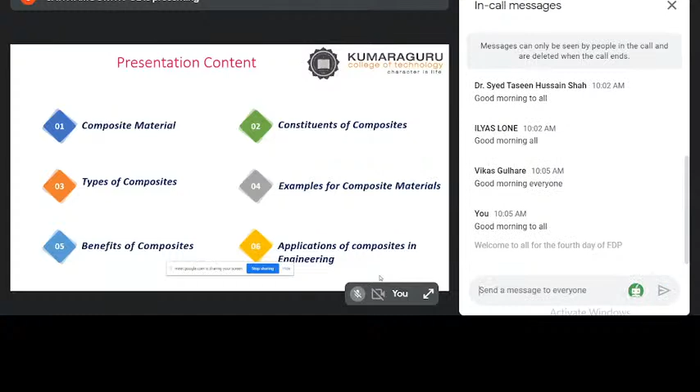Then why people want to do more research on composites and what makes them go for composites. What are the benefits they want to highlight about composite materials by introducing them to the world, that I wanted to share with all of you. Then I wanted to touch upon some important applications we currently make use of and how it supports achieving sustainability and sustainable goals that are spoken about today widely by many institutions.

That is very important because any material we develop should not spoil the specifics which generations need. That is what, in the present, we want to go for in development. Keeping this in mind, how far these composites are widely used for supporting sustainability, that I wanted to discuss. I want to leave the session for at least 10 to 15 minutes for any queries to be answered.

Hope I am audible, madam. Am I audible? Yes, sir, audible. Thank you, sir. Don't mistake me, just wanted to check it because I am talking to the group. Sometimes because of internet problems we may miss the audience, that is why kindly excuse me, sir, madam.

Coming on to the introduction to composite material, it is nothing but a combination of two or more different materials that results in a superior, often stronger product. This is very important because whenever we aim for any material, it should give superior quality by removing the shortcomings of the individual materials. We combine them together to make a superior material. That is the idea behind research in composite materials.

Simply, composites are the combination of components. An ideal composite is made up of materials that complement each other's shortcomings. This is very important because, when we say concrete, we know pretty well it is good in compression but weak in tension. Similarly, as a civil engineer, we know that RCC will act as a monolithic, single material, but by doing RCC it is called one of the finest innovations in civil engineering. Like that, when shortcomings are there, they have to be removed by combining two materials. That is what the composite material definition says.

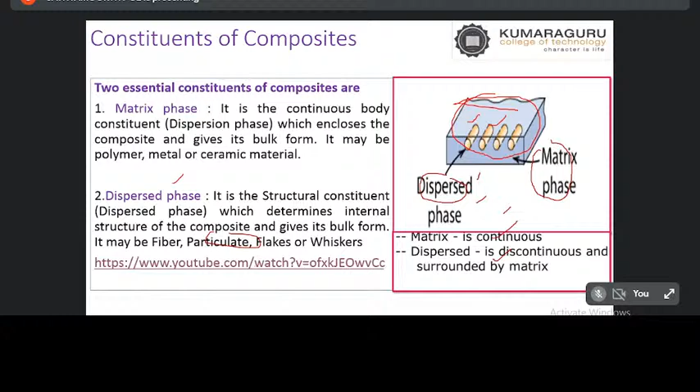Anyhow, that is what we are seeing. A glue-like disperse phase, and obviously a matrix phase will be there in order to form the composite material. Whereas in the form of the particulate, the fiber, all those things, we can make use of it. Thank you, sir. We can go for the creation of the composite material.

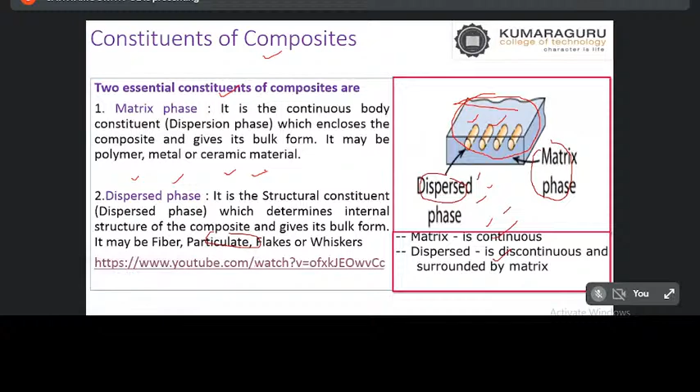That is what is very important, because without having dispersed phase as well as matrix phase, it is very difficult to form the composite. But it could be of any form, maybe a glue form or maybe tying form, whatever the form. In simple terms, the polymeric matrix and the reinforcement fibers will come up as a composite.

The reinforcement material could be glass fiber, natural fiber, carbon fiber. That is what the research nowadays is going on. We call it green composite. Of course, bamboo is almost being implemented in the place of reinforcement. Like that, many research is going on.

My idea behind sharing this to all of you, our young student friends, as well as the professors who are about to start their research work, is that this can throw some light on the natural fibers and how they can be used for the benefit of engineering. So that would be highly helpful.

Again, when we use some sort of particulate material like sand, talc, other things, the color chips, all those things - so what is the purpose of making use of these two, sir? When the polymer binds the reinforcement, it should be more structural. That is what it can be used for structural purposes.

Suppose, for example, if we make use of the particulate, other matters together, it should be aesthetic looks. That is what, like the ceramics, all those things, even recycled glass, we can make use of it. That depends on the situation, depends on the requirement. We can go for the manufacturing of the composite material. That is the idea behind sharing this slide with all of you.

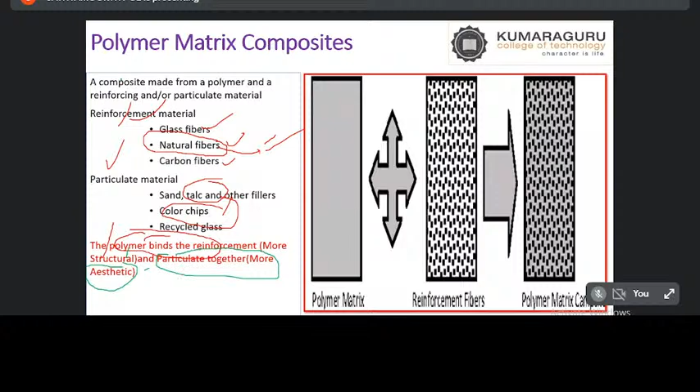Again, coming on to the types of composite - traditional composite. Many composite materials have been used maybe from the year 1800, because people, without knowing the physical and mechanical properties of the material, kept on using it by virtue of the quality and abundance available in the place wherever they were living.

In our ancestral or traditional period, composites are used. But only now are we in the process of highlighting those and doing engineering work on that, putting the mechanical and physical properties to the world so it can be documented. And if you want, we can try to mimic traditional materials, especially for the benefit of restoration of structures, or monumental structures. That is the idea behind giving some light on traditional composites.

Again, advance of technology helped us go for some sort of conventional composite. From there, by modifying some properties, we went for advanced composites. Nowadays, the green concept is part of all composite material. How best these green composites can be widely used for the benefit of humankind - that is what research is being focused on by many researchers. The green composites, because green is nothing but renewables - that is what we are focusing on.

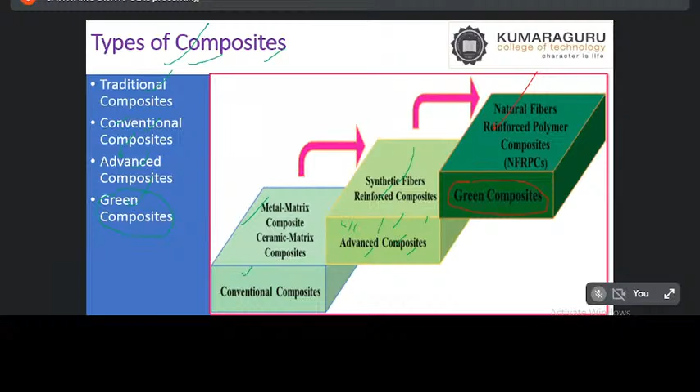The metal matrix composite, the ceramic matrix, those in initial form, then synthetic fibers - civil engineers use fiber reinforced concrete, fiber reinforced plastic, many composites came into existence. But now we are taking the center stage of natural fibers, which can be called green, and which can be biodegradable in its afterlife when put into the environment. That is the idea.

This is called traditional composite. Two examples are mud bricks. Even from ancient times, we have been using mud and straw without fully knowing that when combined together, it can be capable of taking load and be put into the superstructure. Straw was resistant to stretching and the dried mud copes with compression. This is one of the simplest examples of how traditional materials can be combined and used as a composite.

Wood, of course, is a natural composite. It is a composite material made up of long fibers of cellulose, supported by an adhesive like lignin. This is very important because nowadays, using this property, we are making 3-ply, 4-ply woods, which is called engineered wood. We make it by putting parallel as well as perpendicular grains of plywood, increasing the strength for the benefit of building constructions.

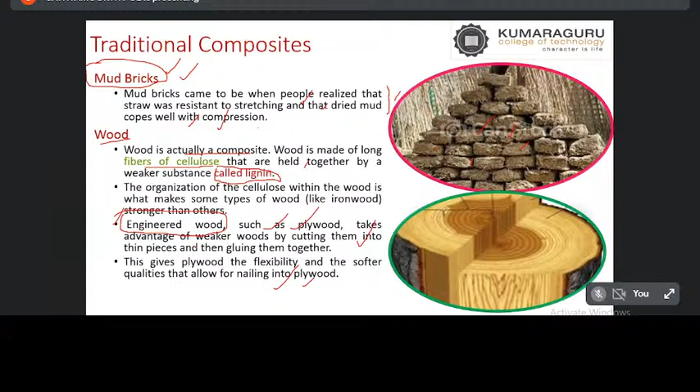The plywood's flexibility and softer qualities allow nailing into it, which is this particular composite. The natural wood itself is a composite material because the long fibers are held together by a substance called lignin. It can also be made into engineered wood by reinforcing with alternate layers of parallel and perpendicular grains of wood. That is what we civil engineers use. This is all traditional composite.

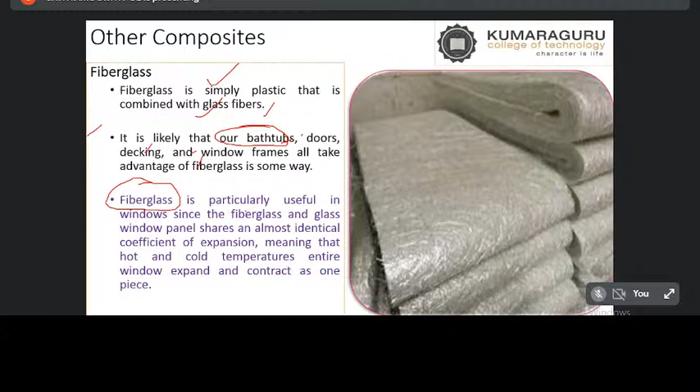Coming to conventional composites, fiberglass is simply a plastic combined with glass fibers. This is one of the good innovations used for bathtubs, doors, decking, and all those things. The best quality is that whenever we use fiberglass windows, the fiberglass and glass window panel both have identical coefficient of expansion. That means they will not expand or contract separately. In hot and cold temperatures, the entire window expands and contracts as one piece.

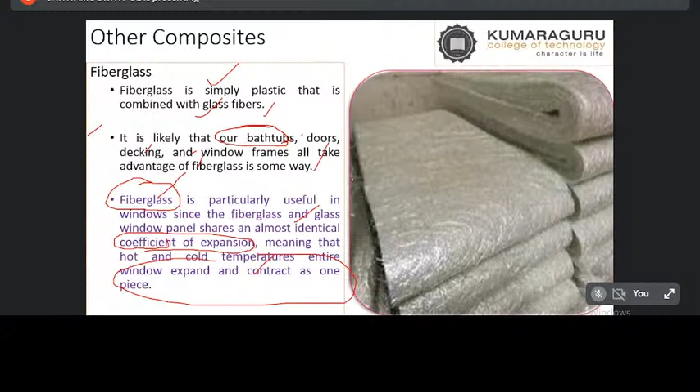That is the advantage of using fiberglass in window panels, which we extensively use in civil engineering. Then there's transparent concrete, which civil engineers nowadays appreciate. As we know, concrete is a primitive example of composite material because initially, the amalgamation of cement, sand, blue metal, kept separately with water, looks like a simple material. But when you add water, it starts binding and gives you good strength according to the design.

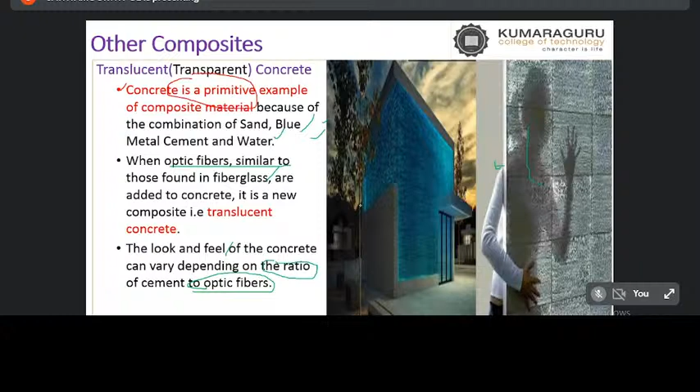Similarly, by introducing optic fibers, which look like fiberglass, we can make transparent concrete. The look and feel of the concrete can vary depending upon the ratio of cement to optic fibers. By increasing or reducing this ratio, we can see a girl standing behind the concrete and make out the skeleton. This is for making elegant appearance, and the use depends on the engineering design decision. Innovations are ongoing to make use of this for supporting lighting inside rooms and other things.

Again, you will appreciate the thirsty concrete, or absorbent concrete, which can absorb close to 4,500 liters of water within 60 seconds, which is called permeable concrete. Many of our civil engineering professors and students do research on this. We also won, in our institution, the TAMILNAD Skill Summit Award, first prize, with a cash prize of 50,000, for doing research on this permeable concrete.

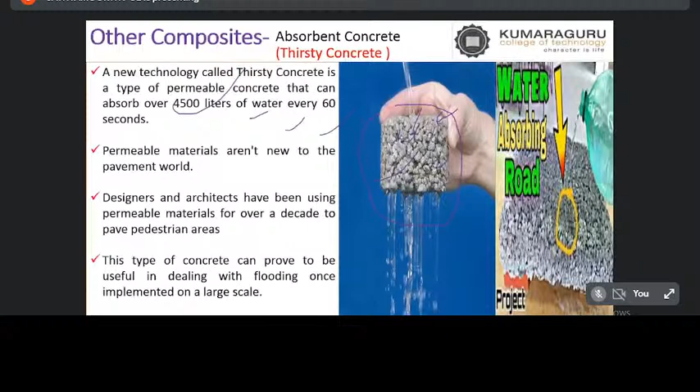Nowadays we are also doing some research on lightweight permeable concrete, so that in water bodies, by putting solar panels on the concrete, we can float it on the water body to try to avoid evaporation. Some innovations are going on like that, and we can also try at your end so it can be a good contribution for the civil engineering field. That is the idea of sharing this. Designers and architects, especially for pavements, widely use these types of concretes.

This type of concrete can prove useful in dealing with flooding, wherever it occurs. It acts as a sponge, and sometimes it will try to penetrate. We try to make use of it by modifying some of its properties, or by adding certain agents to the concrete. By extensively studying it, we can achieve that. That is the idea.

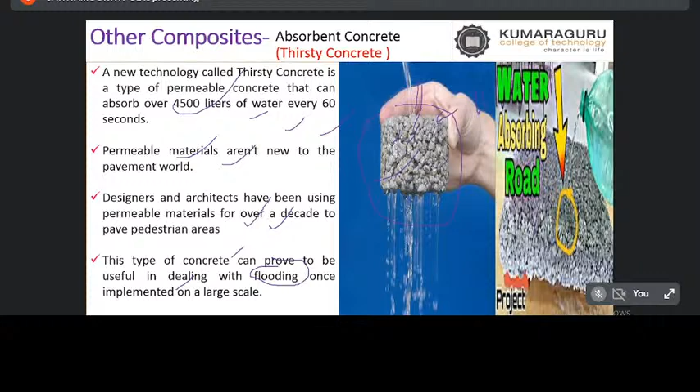Kevlar is one of the important materials, especially for the benefit of army people who use it. It has extremely high tensile strength and can resist stretching quite well. Kevlar's compression strength is about one-tenth of its tensile strength, and it is combined into composites. Airplanes, boats, bicycles, motorcycles, clothing, Nike shoes - all these take advantage of Kevlar's high tensile strength property. Even gloves and body armoring make use of it.

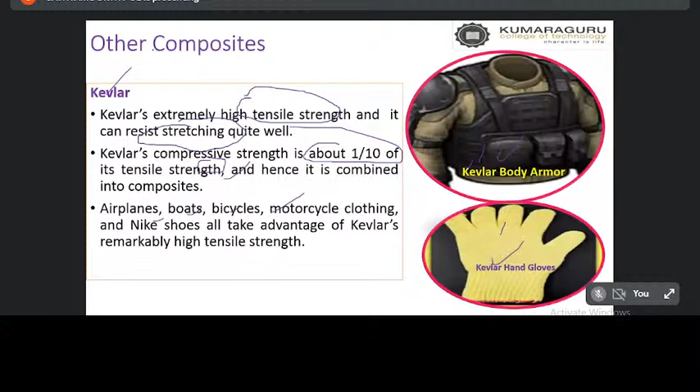Some researchers are also working on this. People are doing this type of research in medical fields and medical textiles.

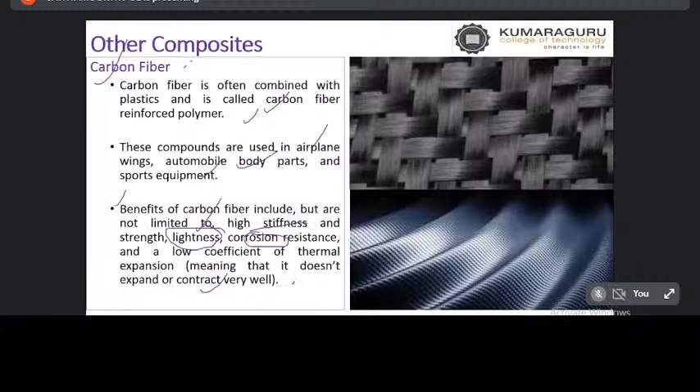Carbon fiber is not a new material. Carbon is widely used for the benefit of civil engineering as well as other engineering fields, especially in nanotechnology. Carbon fiber is often combined with plastics, called carbon fiber reinforced polymer. It can be used for airplane wings, automobile body parts, and sports equipment. The benefits of carbon fiber include high stiffness and strength, and lightness - which is very important, since materials should always be light. It also has corrosion resistance and a low coefficient of thermal expansion, so it does not expand and contract much. Because of these properties, carbon fibers are used extensively in the engineering field.

Pykrete is one of the famous frozen ice composites, where approximately 14% sawdust or another form of wood pulp is mingled with 86% ice, by weight. During World War II, it could be used as a supersized aircraft carrier for the British Royal Navy. Pykrete is also known as bulletproof ice.

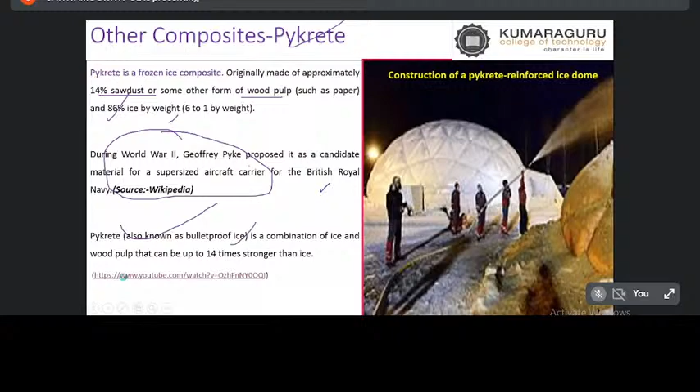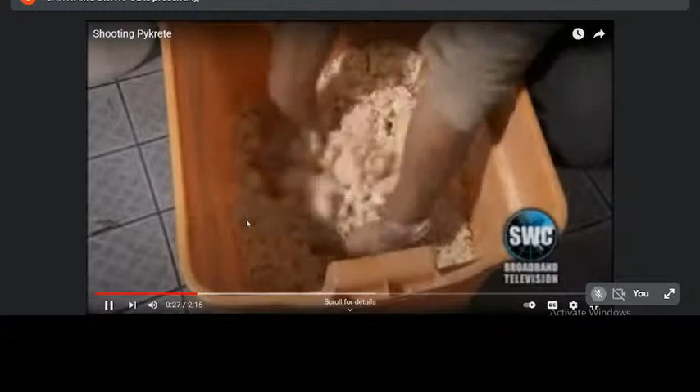So just by combining the sawdust, it can be used as a bulletproof material.

I'm here to smash the Pykrete. Mike meets with Rick Dunn at the Bull Meadow Rifle Range to perform his own ballistics tests. Whoa! It disappeared. So is that what we're going to do with the Pykrete now? We'll do the Pykrete and see the test results. I have to admit, I'm impressed - what a difference, how incredibly strong the Pykrete is. Now that didn't do nearly as much, and how simple it is to make. As it melts, the outer layer softens and creates its own insulation. You're lucky the rest of it stayed frozen - that's not going to break, might have to shoot it with a shotgun to get it apart. I'm starting to think there may actually be something to this crazy scheme of building a ship, not of ice, but of Pykrete.

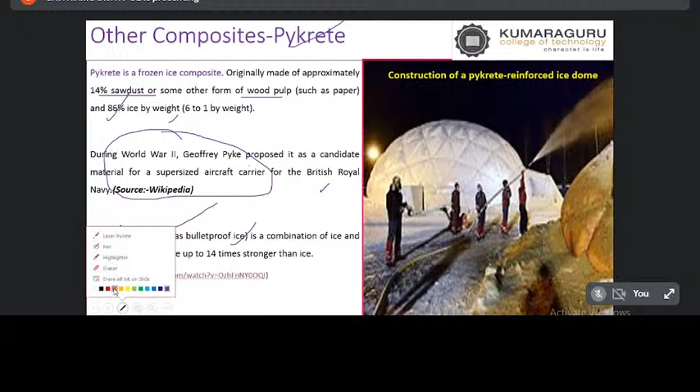When combined with wood pulp, ice can be 14 times stronger. He is shooting two specimens - one made of ice, another made of Pykrete. This type of material can be made and is highly useful in the army. In Rajasthan and similar places, using this bulletproof material, they simply add sand and then put up barriers to hide and shoot at enemies. Some material is used this way for the benefit of protecting our motherland, such as the Pykrete-reinforced ice dome.

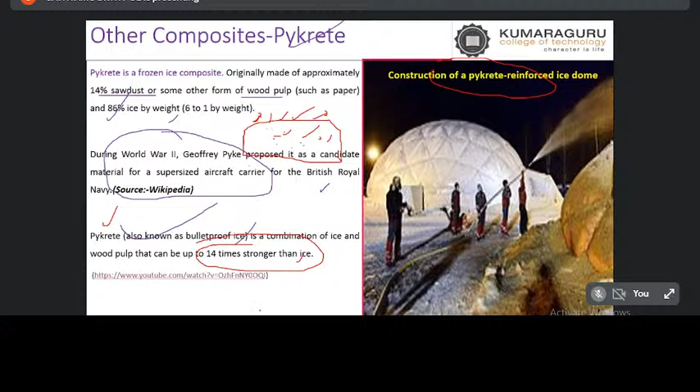So that is the honeycomb structure. Of course, many of our civil engineers know pretty well what honeycomb is all about. It's a broad category of composite that shares the same characteristics of honeycomb design. Man-made composite honeycomb is useful because of its high compressive and shear strength.

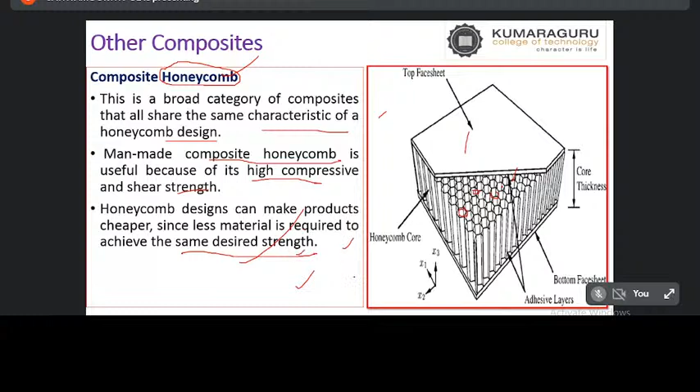Why do we go for honeycomb design? Because it can make products cheaper since less material is required to achieve the same desired strength, and that is very important. Likewise, by having honeycomb structures, we can create things that can be used for lightweight construction, and also in roofs for making big stadiums.

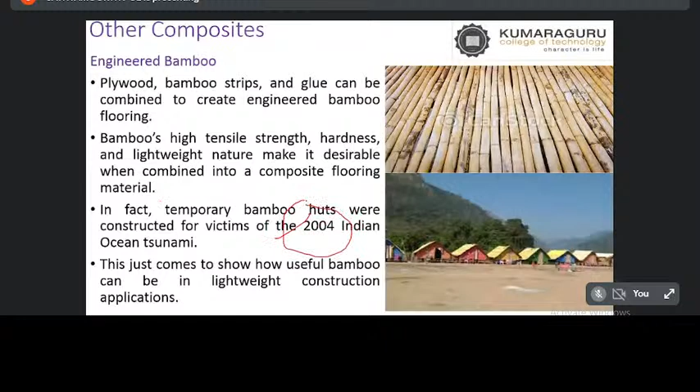During the time of the tsunami, we also did some charitable work in the Nagapattinam area. Engineered bamboo, that is plywood bamboo strips glued together, can be used as flooring. Temporary sheds can also be made using bamboo, thereby providing temporary shelters for people affected by natural disasters. This just shows how useful bamboo can be in lightweight construction applications.

When you go to Japan, we know pretty well it is a highly earthquake-prone area. That is why much Japanese construction is based on bamboo, because even if an earthquake disaster happens, people's lives can be saved. That is the idea behind using bamboo as a construction material, especially in high earthquake-prone areas.

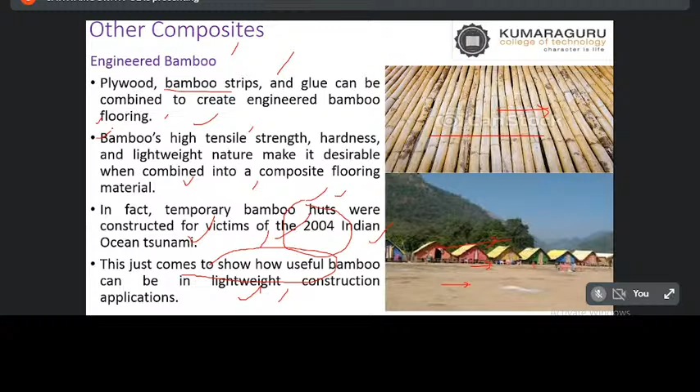Again, I wanted to throw some light on the benefits of composites, why we have to do research and make use of certain composite materials in engineering. Number one property: extremely durable. According to people who love composite work, it is extremely durable, light in weight, and impact resistant. Like a Pykrete, even with the back force of a bullet hitting it, it is highly resistive.

Again, design flexibility, wherever you want to use it. It need not be applied wantonly; wherever it is possible, we can do it and make it as a monolithic design. High strength to weight ratio is another benefit.

Part consolidation is very important because by combining different composite materials, you can make it as one material through part consolidation. Corrosion resistance is one of the finest properties I believe with respect to composite material. Also heat resistance and toughness—even though it may look like paper, it is highly tough to tear or pierce.

Sound dampening is another property highly used in recreation centers like cinema theaters where you want to keep the sound intact. Insulation properties—these are all good properties of composites, because the good qualities of two materials are combined together. That is why most composite materials will have the notable properties we are discussing here.

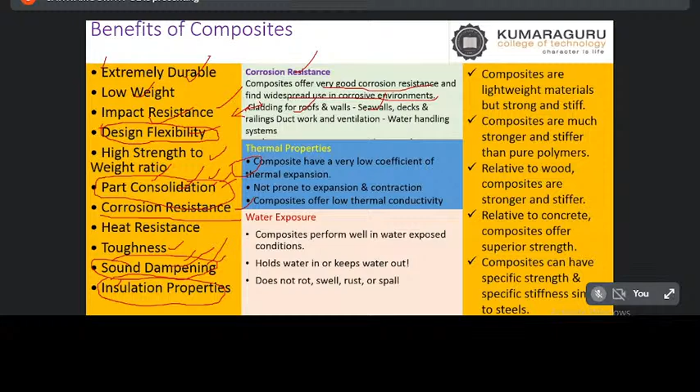With respect to corrosion resistance, composites offer very good resistance and find widespread use in corrosive environments, especially cladding for roofs and walls, and sea walls. When you use concrete, you have to go for retrofitting, but this type of composite material highly helps in seashore structures and water handling systems wherever there is salt water.

Thermal properties: composites have a very low coefficient of thermal expansion, are not prone to expansion and contraction, and offer low thermal conductivity. That is why, without hesitation, we try to make use of it in most places where good composite material is found.

Again, water exposure—composites perform well in water-exposed conditions. They hold water in or keep water out, so whatever property is intended, it can support that, and does not rot, swell, rust, or spall. Whenever we use concrete or brick, these types of failures may happen, but once composite material is made, it will be long lasting forever.

Composites are lightweight material but strong and stiff. Composites are much stronger and stiffer than pure polymers, so instead of pure polymers, we go for the combination.

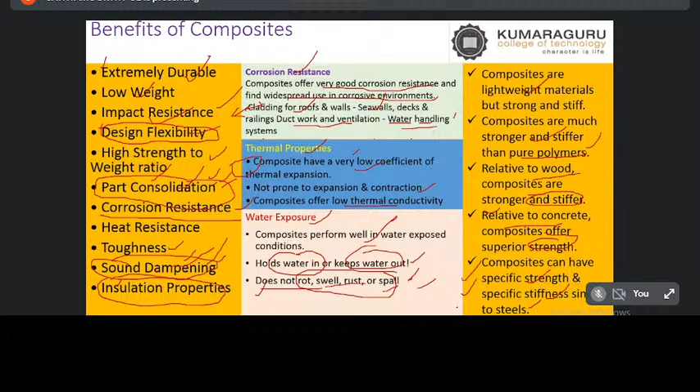Coming on to wood, it is stronger and stiffer. Concrete can be made with superior strength. Composites can have specific strength and specific stiffness similar to steel. People are trying to make use of this property in concrete, wanting to replace steel and make use of green composites in reinforcement, making it a wonderful material like RCC.

You name any field in engineering, composites have wider applications. Here I wanted to touch upon some important fields where we use composites, especially in building construction applications. This type of cladding material can improve daylighting as well as support alternate energy, use of daylighting, and elegance - all these things you can make use of with this particular composite.

Again, automobile industries, where most parts of the car we can make use of it. In those days, whenever the car got damaged, we had to remove the entire part. Nowadays it is not so - only the part where it is damaged, including the color composition, everything can be done in such a way. The composites are highly helping for part integration as well as the applications.

Again, aeronautical applications, structural components like wings, rockets, armor, missiles - everything, it is highly usable. Again, marine applications, the shaft, hulls, all those things, it is highly usable.

Coming to the helmet - of course the protective helmets, especially civil engineers wear helmets and go for site inspection. For that, these composite materials are highly helpful because when we go for composite material, the light weight helps us with material improvement or sometimes material cost reduction. But the safety aspect, that is very important.

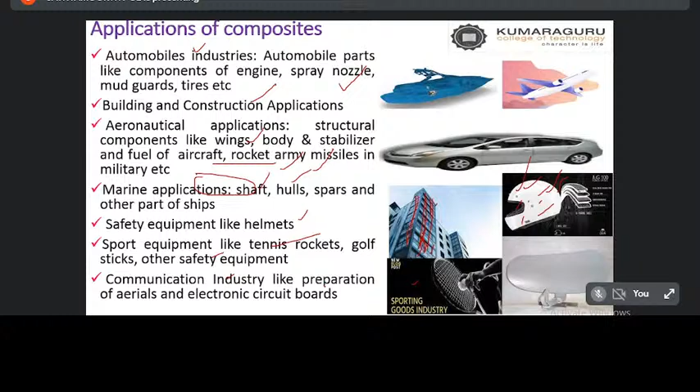Sports equipment like tennis rackets and golf sticks, you can go for it. Communication industries, the antennas and circuit boards - you name any engineering, biomedical engineering, yes, application in any engineering field, composites are unavoidable things nowadays. It is being widely used in all sorts of engineering.

Coming to automotive, the first commercial car bodies used composites maybe in the year 1950. But you see significant utilization of unique design for various things. What properties make them use this particular composite? In automobile industries, they have design freedom - which part to be made, they can make it and integrate. Low weight is also very important. Part consolidation, as I already told you, part by part we can make it and then join or make it as a monolithic one. Corrosion resistance, that is very important.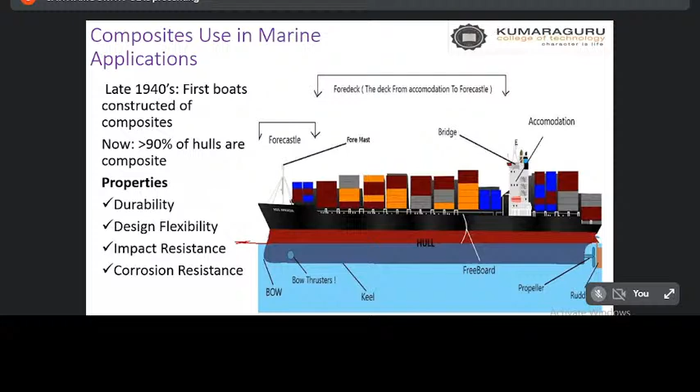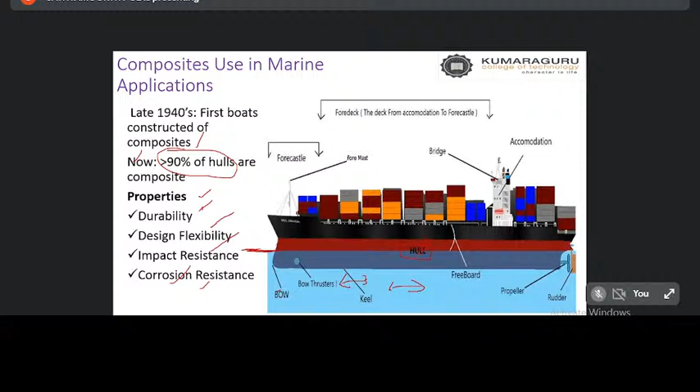There should be proper design flexibility that can give impact resistance, because loading and unloading sometimes may cause some impact. Again, corrosion - because it is sailing in the sea, we have sea water with high chloride content or brackish water. It should be capable of moving through the sea without corroding. That is what this property helps us with, going for composite especially in marine applications.

As I already told you, in aerospace, closer to 8% was used maybe in the 70s. Now most aircraft use composite - 80% by volume, 50% by weight. What property makes them go for it? Lightweight should be there, because whenever the aircraft lifts, as well as for safe landing and takeoff operations. Again, high strength with low weight.

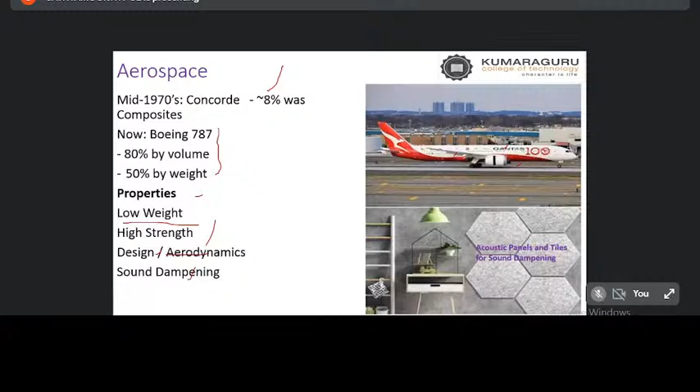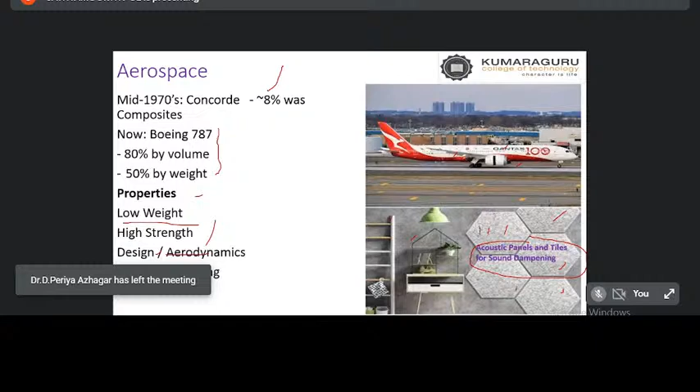Again, design pertaining to aerodynamics, the sound dampening - that is also important. When it takes off you can find a huge sound, but people sitting inside the airplane cannot hear it. Likewise we can go for acoustic panels, tiles can be used, and we can make use of it creating very good acoustic-proof theaters, recreation theaters, or discotheque clubs.

All those things are possible by means of composites. I wanted to give some examples - wind turbine blades, because wind is generated by the blades. Obviously, these blades are fiber-reinforced, maybe at 30-meter elevation, and it has to rotate.

But what property is helping us here? High strength, low weight, toughness, and corrosion resistance - all these are highly helpful for making the wind electric generator blades. At the tip, we can add a yaw mechanism to rotate and sense the wind direction and generate electricity. Nowadays, the entire wing is also used for the yaw mechanism, sensing the wind and rotating to generate power. In such a way, we can make use of it.

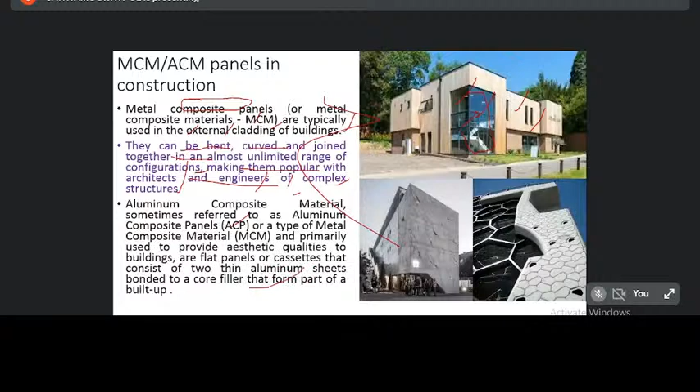Again, aluminum composite material, sometimes referred to as aluminum composite panel, is typically used as the same type of panel to provide aesthetic qualities to buildings, or as flat panels. Sometimes thin aluminum sheets can also be used for the benefit of creating aesthetics as well as improving lighting inside the building.

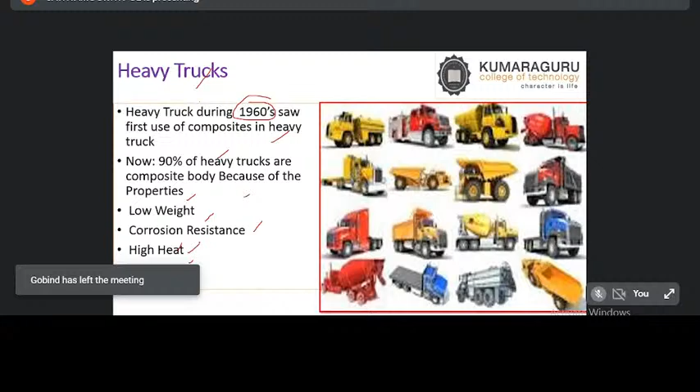Again, for heavy trucks, in those days only a little percent had durability and high heat resistance, which is very important. So whenever we make use of it, the heat resistance property is one of the important properties. That is why it is widely used in heavy trucks, especially in the automobile area.

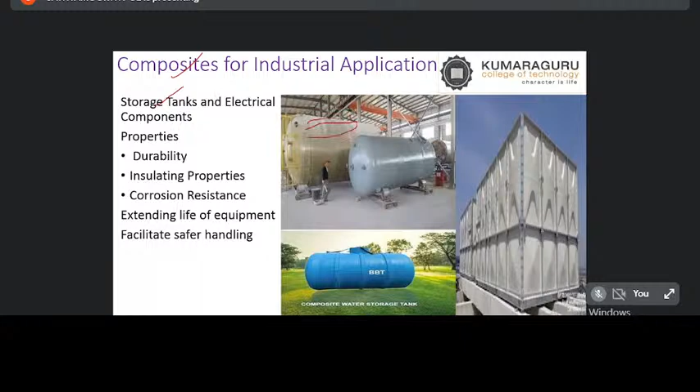Again, this can be used for industrial applications too. Many composites are used for industrial applications, for storage tanks, especially chemical storage, water storage, or acid storage, and electrical components. What makes it suitable? Durability, insulation property, and corrosion resistance are highly important, because sometimes you store acid or highly acidic liquids, even wastewater containing acidic liquid.

What is the purpose? By extending the life of the equipment and facilitating safer handling - even the tank itself, with huge weight, is very difficult to move, so lightweight tanks which are leak-free are useful. When made as a monolithic one, this can be highly usable in industry as well. That is what I told you.

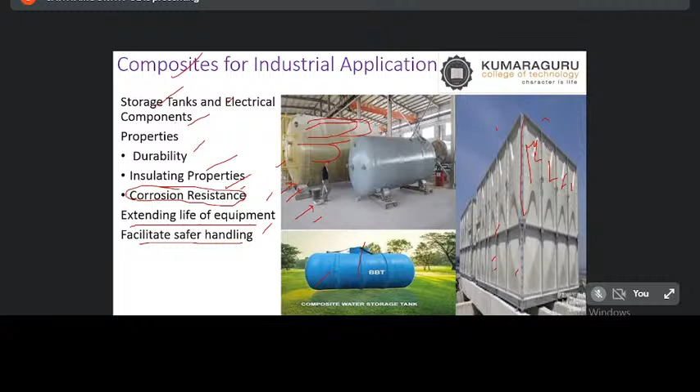This type of sheet-like or cloth-like structure can be combined together. We can pour sand into it and use it as a camouflage barrier in the army, especially along the border area of Rajasthan. Sometimes this can also be used as a water storage tank for storing water in military areas where water is scarce. We can make use of it like that, for making composites.

Again, composites should align with sustainable development concepts, which we are hearing about widely nowadays. Many of our students are also encouraged to frame their projects towards achieving the Sustainable Development Goals, the 17 goals. Like that, we are moving towards that. What does sustainability mean? Without spoiling any future generation's prospects, any work we do in the present - that is called sustainable development.

That is what the Brundtland Commission says, sir. We can do any work in the present, any research work, any policy, anything you can do in the present, but it should not spoil the future generation in such a way. Whenever we do any activity, that particular activity, that particular policy, that particular material, everything is called sustainable.

That is what we call sustainable development, or moving towards the 17 goals of sustainable development. One of the goals says we have to create infrastructure using sustainable means, so that we can tap the benefits of composite material for the benefit of creating peace in society, protecting the planet, for the benefit of people, and the prosperity of society and partnerships. Likewise, we can include any material towards sustainable development. Of course, we are doing that also, sir, with respect to composites.

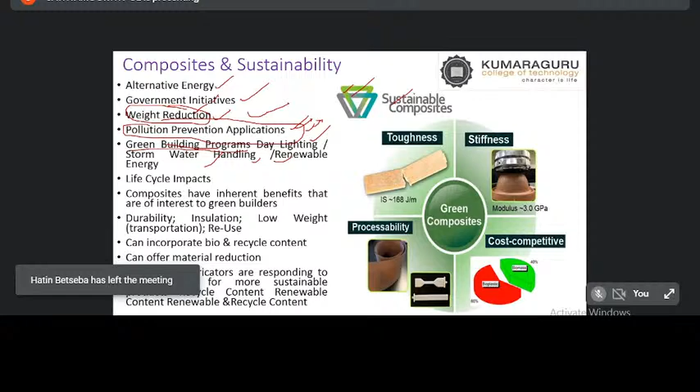That is what makes modern day composites highly useful, sir. Even nowadays, panels make use of a groove joint panel so that whenever they want to use it, they can, or whenever they want to dismantle it, they can dismantle and take it to a new site. Again, it can incorporate bio and recyclable content - you see, plastic recyclable content can be used. All those things are possible. Bio means it can be degraded by organisms, and recyclable content is also usable.

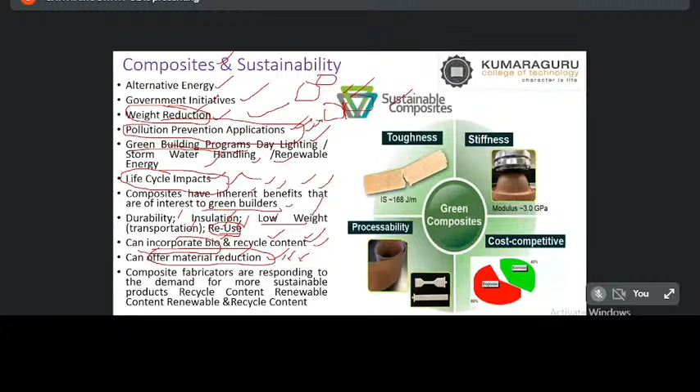You can also offer material reduction. Whenever we use virgin material, we have to use more quantity. When we try to go for recycled content, obviously 10 to 15%, or a maximum of 30%, we can replace. That is what Portland cement says - OPC is a virgin material, sir. When you go for PPC by adding fly ash, you can make it one of the finest composites. Likewise, of course, not every combination can be called composite, but when some property is enhanced by adding or mingling a particular material, definitely we can say it is a composite material.

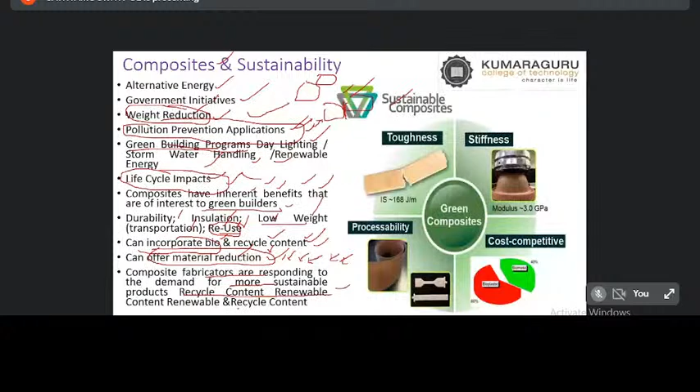Again, composite fabricators are responding to the demand, because whenever we produce good material, they make use of it in their buildings. And then they allow for recycled content, renewable content - they are ready to use whatever we offer in the form of sustainability. When we prove the quality, definitely green builders are ready to support and embrace us for implementing it in their buildings and structures.

Coming on to the new topic, where wide research is going on - green composites and natural fibers. That is very important. Natural fibers like bamboo, and similarly we can use all natural fibers. Of course, sometimes natural resins make a light and strong composite that is recyclable or biodegradable by a trigger.

That is very important. You see, recently I heard, maybe in a newspaper, that in Israel bioplastics or even plastics can be made biodegradable. Like that, we can see some good innovation.

We also throw some light on getting green composites, like plant resources, green fibers, green polymers - we can go for that composition. Of course, by doing the literature review and modifying some properties, you can create wonderful composite material. That is what I wanted to say.

Even some kitchen cabinets, especially for ladies, use copper bottom utensils. Even in the kitchen cabinet, these composite materials have wider applications where we can make use of these composites for the benefit of not only engineering applications, but even for home appliances, medical as well as sports appliances - we can use them and hasten the benefit of the composite material. This is the green biocomposite for structural application.

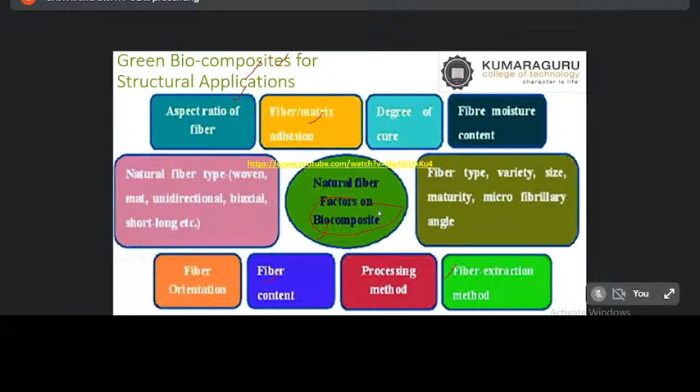The idea is, wherever it can be used, to prevent natural disasters like earthquakes, and the massacres from those can be preventable whenever we use this type of bamboo-based structures. And we will try to make use of the biocomposite in our structural applications.

Because we civil engineers always move with the concept of safety, aesthetic, as well as economy in a model design, because we will not compromise. All engineers won't compromise on safety whenever we make any product, and we give due diligence for economy as well before we give importance to aesthetic or beautifulness. That is what we always do, whether mechanical or civil engineer.

But nevertheless, whenever we use the material, especially for making any product, the composites are highly suitable—especially conventional composites as well as advanced composites. Nowadays research is going on to improve the biocomposite, because the need of the hour is to think of going green and go for biodegradation of material. That is what this type of research is going on.

It could be woven or it could be like that—many things are there. It could be woven material, or maybe unidirectional, biaxial, whatever we think. Of course, all are at research level only. The proven track research can be taken to the field by means of concrete tests in the prototype as well as using it in real field applications. That is the idea behind sharing this slide.

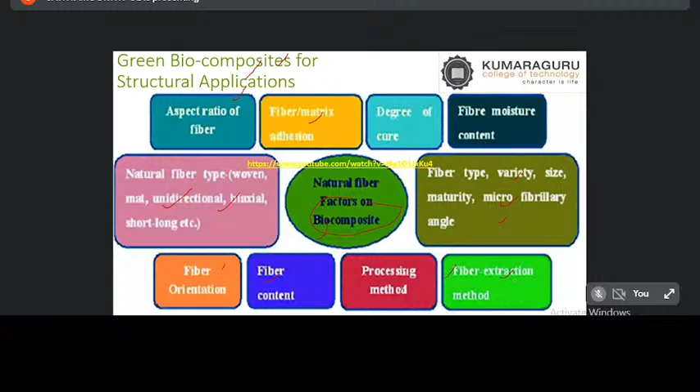I request or urge the research community to throw some light on green biocomposites if you are interested to work on the composite material. There are plenty of opportunities available for researchers to throw light on composite material. That is what I wanted to say—please make a note of it.

With this, whenever we go for the combination of composites, it is highly useful for the benefit of engineering as well as for the benefit of common people.

Before I move to the important slide, the proverb says the scientist discovers a new type of material or energy, and the engineer discovers a new use for it. So that is what we do. One American civil engineer said, we the civil engineers are composite because we are not scientists, not mathematicians, not sociologists or writers, but we have to have the knowledge of using it in an amalgamated spirit to solve any engineering problem.

That is what—so before I go for the disclaimer, we know about Dr. Abdul Kalam, because he is fondly called the people's president of India. Out of his 7 notable innovations, one NGO asked which one is the best. He said the lightweight calipers.

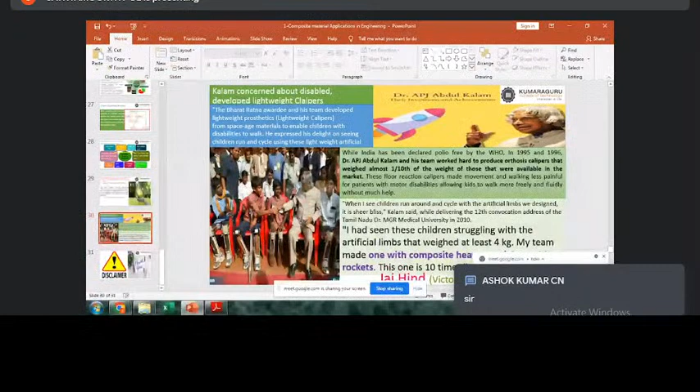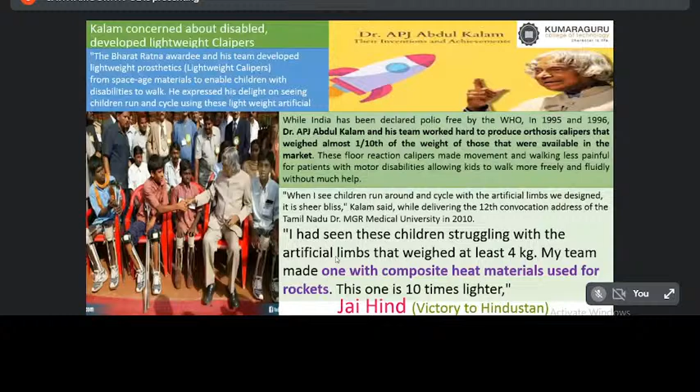With these positive words, I wanted to go for the disclaimer slide, where all the content, whatever I used, maybe from web content, is for the benefit of sharing knowledge with our own people in the virtual session, and not for claiming the innovation as my own.

With this disclaimer statement, I profusely thank the organizers once again for giving me the chance to share some important aspects with respect to composite materials that are being widely used in engineering, and some new innovative topics where researchers can throw some light on composite materials.